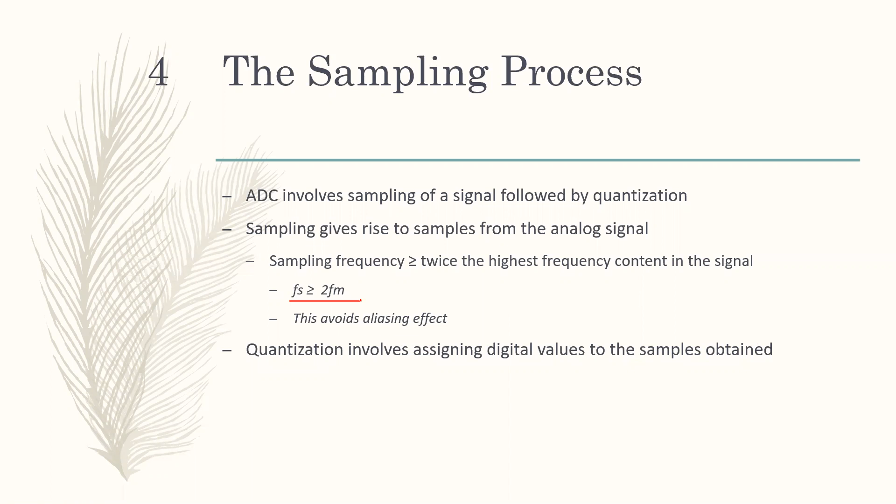Now, one thing to notice is I can have three conditions here. First, Fs is less than 2 times Fm, which is called under sampling. Next, Fs is equal to 2 times Fm, which is called critical sampling, or sometimes uniform sampling. And the last condition is Fs greater than 2 times Fm, which is called oversampling. These are the conditions we can check out.

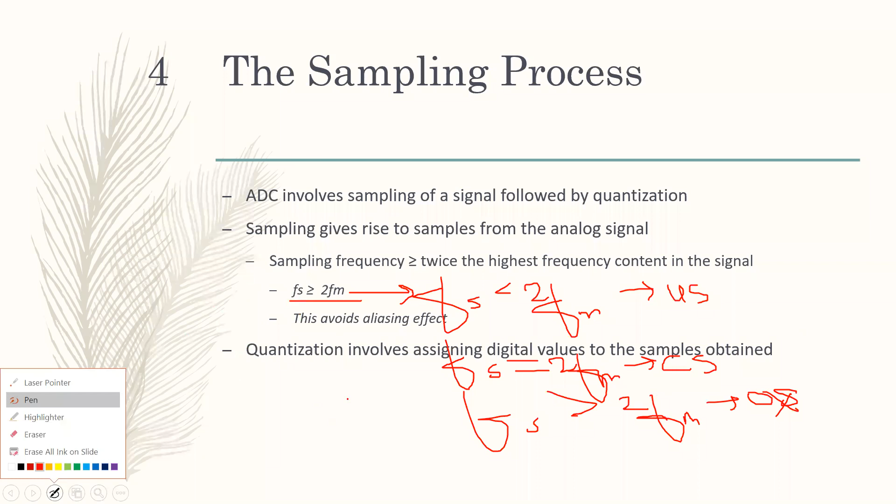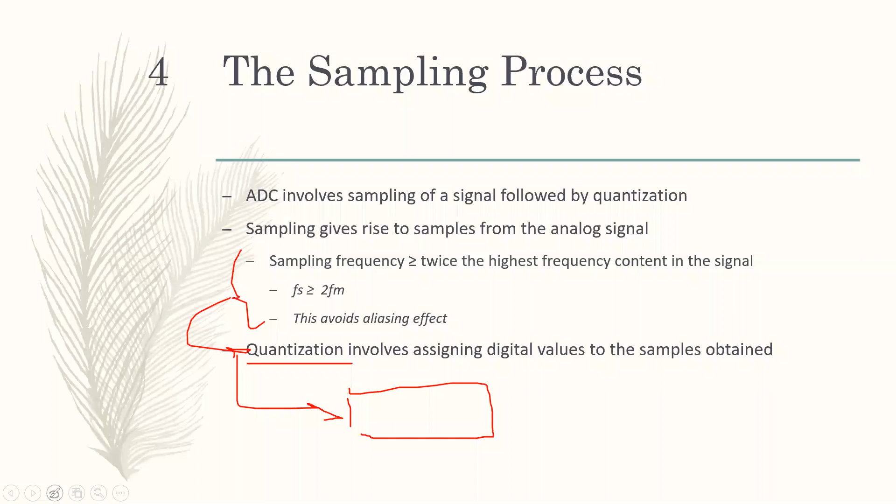That is, I sample with all three conditions, I quantize those values, and once I quantize, I send it to the receiver. The receiver has to try to recover the information from whatever is received and see what signal was sent. So in pulse code modulation, you will be doing these things.

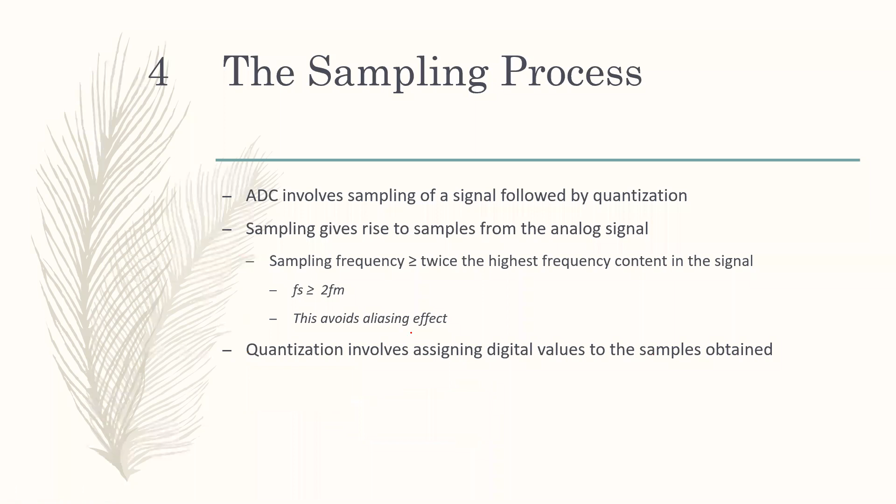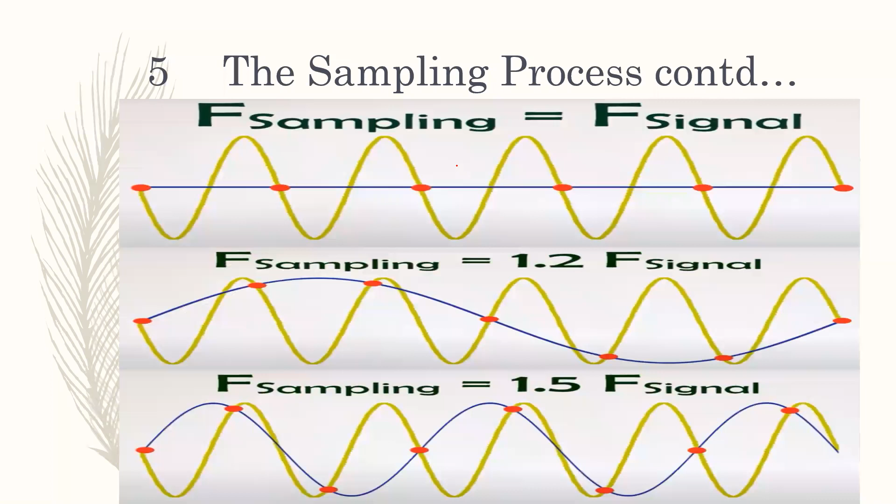This I'll not discuss. So I'll just show a MATLAB program before we go ahead with the Simulink, to see what is actually happening with respect to sampling, and then we'll go ahead with the quantization. Here we have just the sampling code.

This is 0.25 in this case. X is the signal, sinusoidal signal, which will be passed through the sampling process. Now this t is equal to 4, and Fm, that is the maximum frequency present in this signal, is 1 by t, that is 0.25. So let us consider it as 0.25 hertz. Now here we can just observe that Fs is equal to 1.6 times Fm.

So this Fs1 here implies the undersampling condition. If I use Fs1 for sampling this signal, I am doing undersampling. And what happens at the recovery stage? Fs2 is 2 times, which is critical or uniform sampling. Then Fs3, I have written it as 18; I'll reduce it to 8, because otherwise I have to change some other parameters. So it is 8 into Fm, which is greater than 2 times Fm. So this is the oversampling condition.

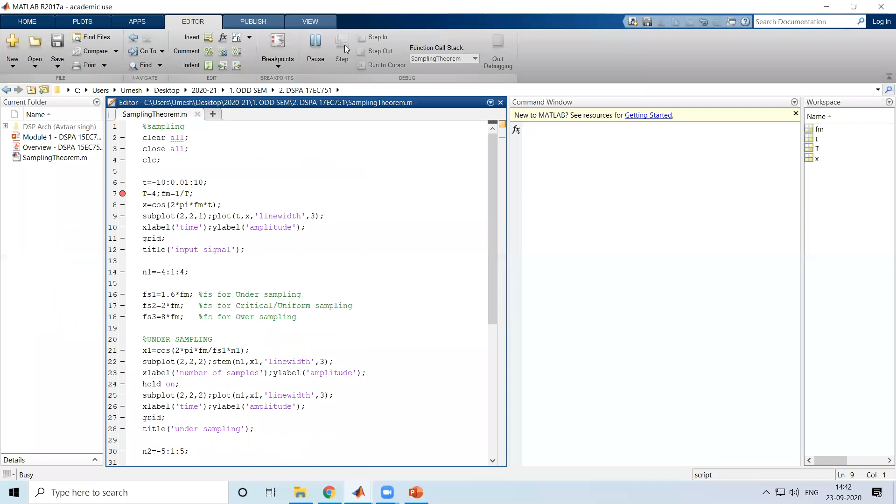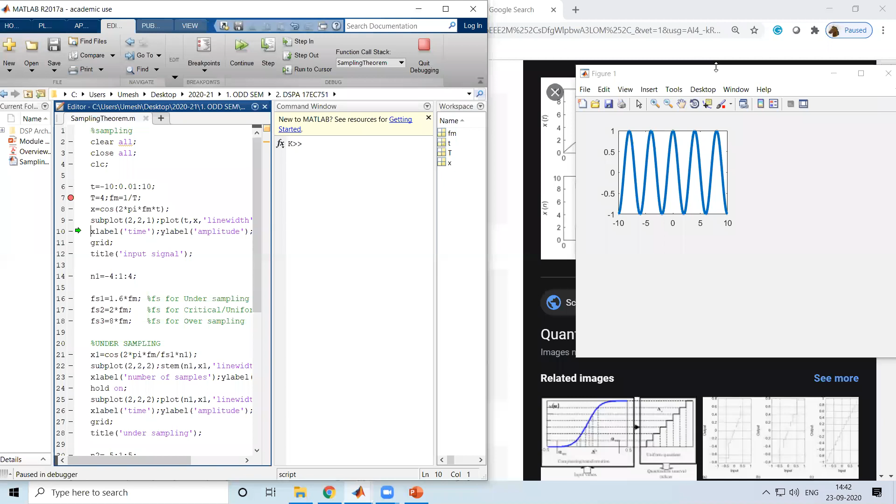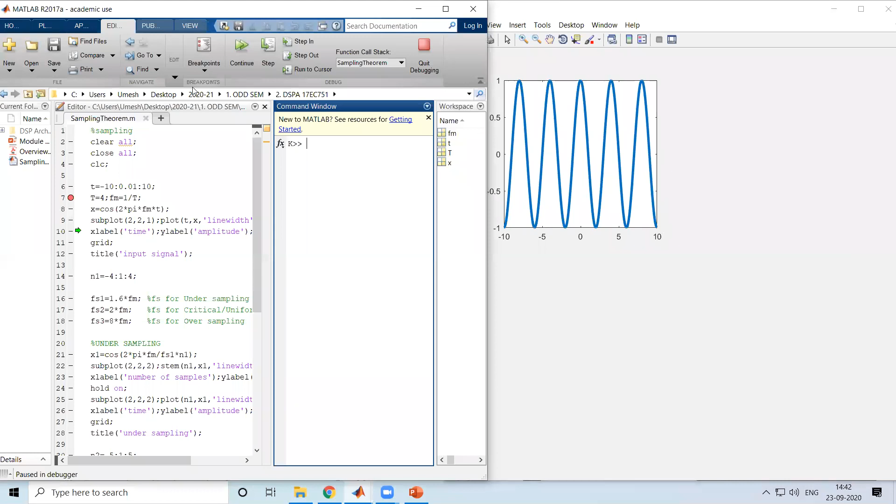Okay, so this is the signal which is present, a sinusoidal signal X. Next, we'll go for the next condition. So fs1, fs2, fs3 will be decided. If I check, it is 0.4, which is less than 2 times fm. This is equal to 0.5, which is equal to 2 times fm, and this is greater than 2 times fm. So these are the values.

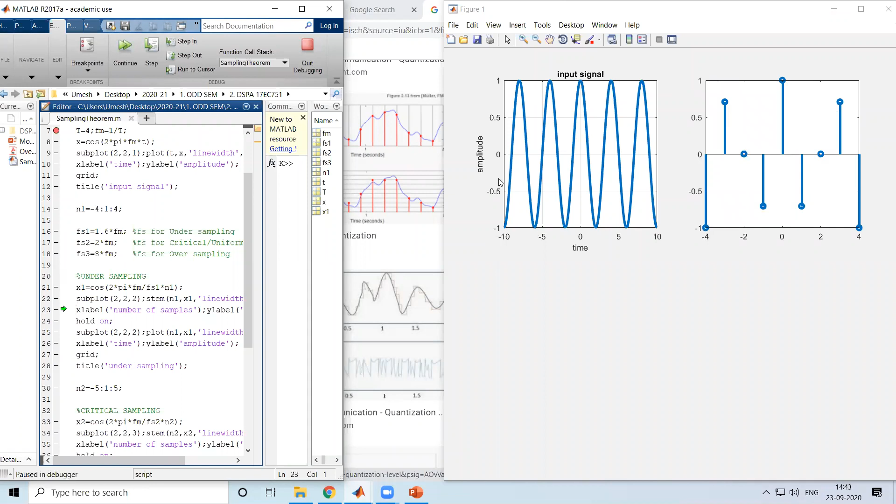So now let us see what will be x1 when we are using the undersampling condition. x1 will be having some values here. If I plot it, these are the samples of this signal. If you see, 1, 2, 3, 4, 5, 6, 7, 8, 9 samples are present for this case when I choose FS1.

Now here, if I try to get back the original signal from these samples, suppose I might use sinc interpolation or linear interpolation. If I give these samples and try to get back the original signal, I would not get the original information. What would happen is you would have joined these 2 points, these 2 points.

So just a rough estimate. So then that would be the signal which you assume was sent. So that is what we'll be doing in the next case. So this is how the signal would have appeared if I'm using linear interpolation. So this is the undersampling condition. Let me go for the next one, critical sampling.

So what happens in this case? Here you can see the number of samples has also increased. Now if I go for sinc interpolation, I might get almost a signal equivalent to the one represented in the first window. But if I use linear, it will come as a triangular wave which will be repeating. So this is how it might appear since I'm just using the linear operation over here. It will just be joining these points.

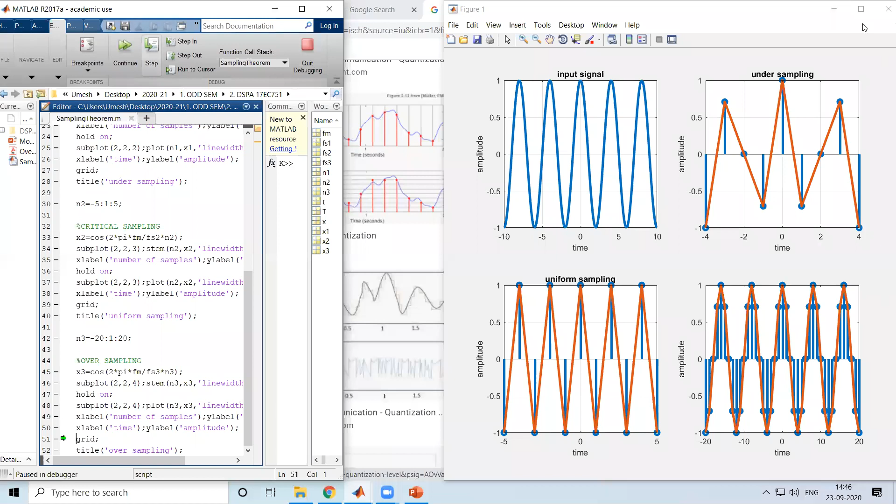So if I just join these points, it would appear somewhat in this form, which is very much closer to the input signal that was sent. So this is the oversampling condition. These are the three conditions. This one is appearing very close to the input signal that was sampled. This one is close enough, but since linear interpolation is there, it is triangular. If I go for sinc interpolation, I would have got very close to the input signal.

So this is related to sampling. One thing to observe is if you do undersampling, recovery becomes really difficult. If you go for uniform sampling, I will be able to recover the signal to some extent. And if you do oversampling, it is assured that you will be very close to the input signal which was actually sampled. Now this is just the sampling process.

Now in quantization, observe these samples you have got. Say these are the voltages represented: -1, -0.5, 0 volt, 0.5 volt, 1 volt. When I take samples, the sample can be at any voltage level. For example, if I use 3 bits, I might start with 000 here. So -1 is represented with 000 and +1 with the highest, 111. So I'll have a total of 8 levels, and I have to divide -1 to 1 into 8 levels.

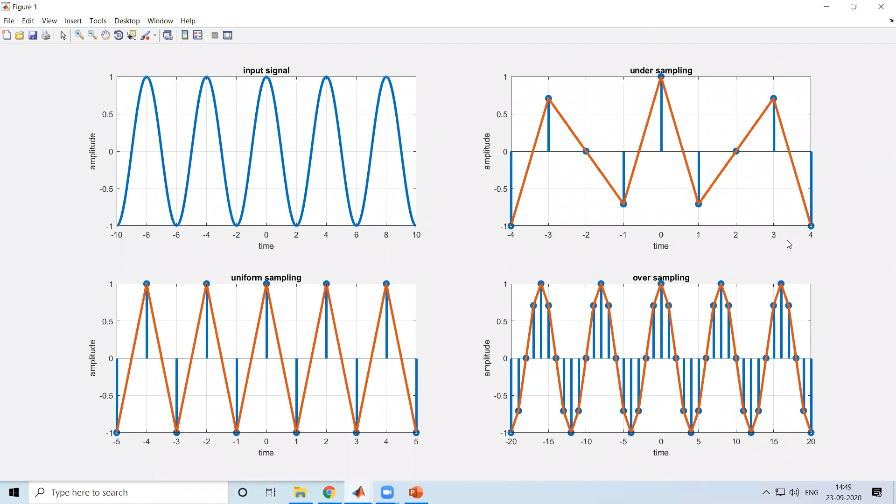So this is with respect to sampling. And in quantization, you are assigning some digital values. So just come back here. That is what is represented here, just another representation so that it will be clear enough. This entire thing is the analog signal, and I want its digital equivalent.

So first I take the samples of these signals based on the sampling frequency. That is where you get the discrete signal. After sampling, whatever samples you have got, we classify them as discrete signals, in terms of x of n.

Now here, just for example, what he has done is he has taken... So in sampling, what you do is you do the digitization of the time axis. So at 0, you take one sample. The next sample you will be taking only after the sampling period. So the next sample will be somewhere here, and based on that, you will be assigning some value to that.

So here, if I just take, this is the value. So in the same way, after every TS seconds, I'll be taking one sample. So in sampling, you are digitizing the time axis. Once you get the samples, you pass it through quantization. So quantization, indirectly what we specify is, it is the digitization of the amplitude.

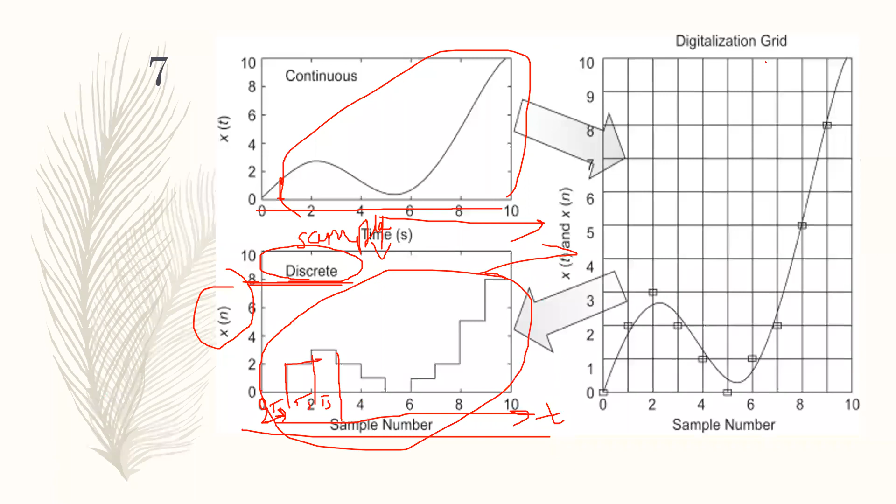So here both the things are given together, and we are just terming it as a digitalization grid. So here we can see that the same signal is represented over here, and these are the samples I'm taking based on the sampling frequency, wherein I am digitizing the timing axis. So I start with the 0th position. The 0th position voltage is 0.

Next sample is taken at this point, which is somewhere here. So if I take this as voltage, I just represent it as somewhere here, more than say 1 volt, just for example. Next sample at 2, the sample is actually over here. Next sample, which is here. So similarly, we continue. Now, once I get these samples, I pass it through quantization.

Now here in quantization, what we have done is we have just taken say 10 levels of representation. If the voltage falls within this, what should be the value represented? Say since we have 10, so 4 bits at least. So this sample will be assigned 0, 0, 0, 0. Next sample is somewhere here, which is close to this level. So this sample value will be assigned with 0, 0, 1, 0.

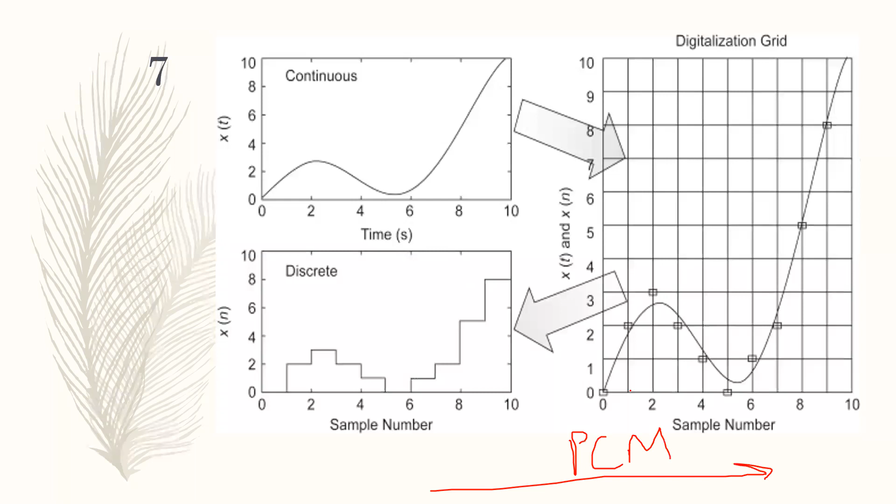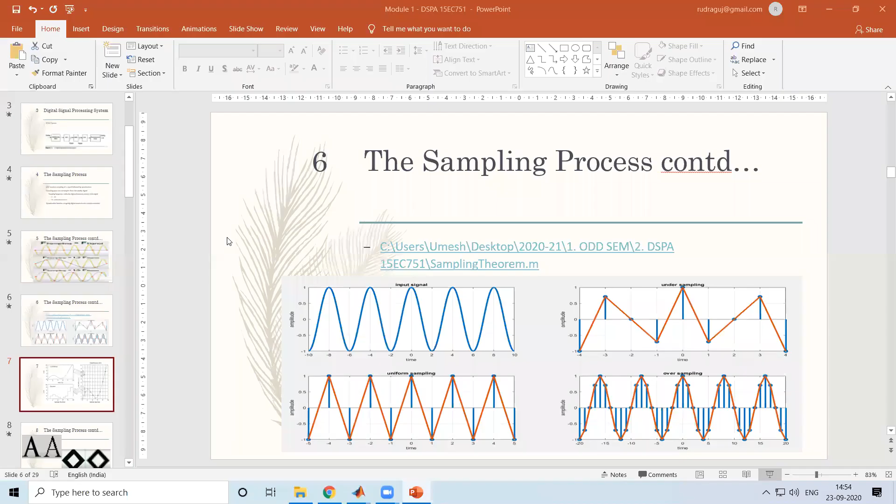So this gives rise to the PCM signal. That is, both these steps together will give rise to the PCM signal. So this is actually the theoretical aspect behind PCM. Now let us see how we can implement the same using simulation. So already I have opened Simulink.

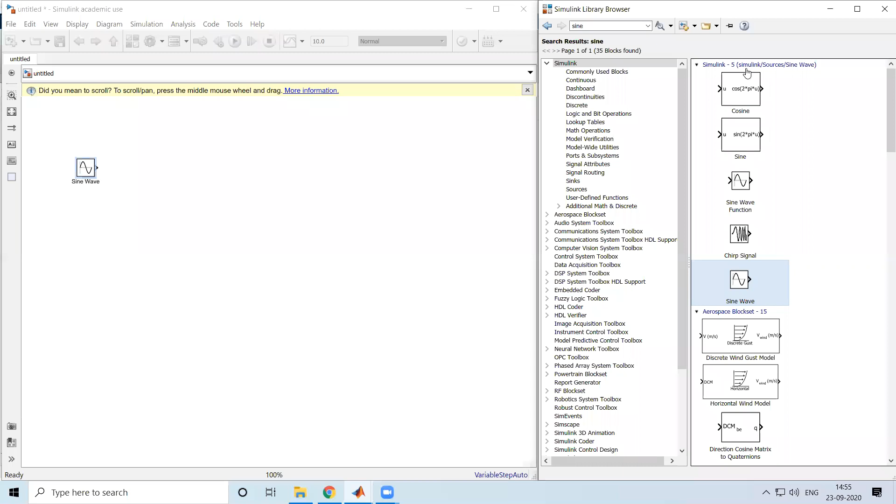So now I'll be adding the blocks as per the requirement. First I need to add a source, so I'll be considering a sine wave source. We can see many options here. Here we have a sine wave function which falls under math operations. Sorry, I will take this one, the sine wave which falls under sources. So you have to add it to the model. So I have added a sine wave, which falls under Simulink sources, sine wave.

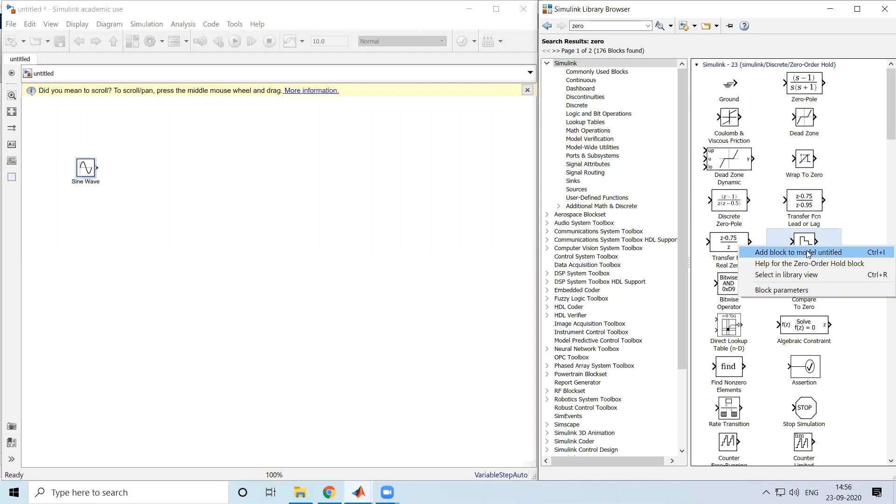Next block, I require a sampler. In order to do that, I take a zero order hold, which gives us a sample and hold kind of function. It will take samples and hold those samples for some time. So I'll add this block. This block gets added. I'll just connect this. So these two are connected.

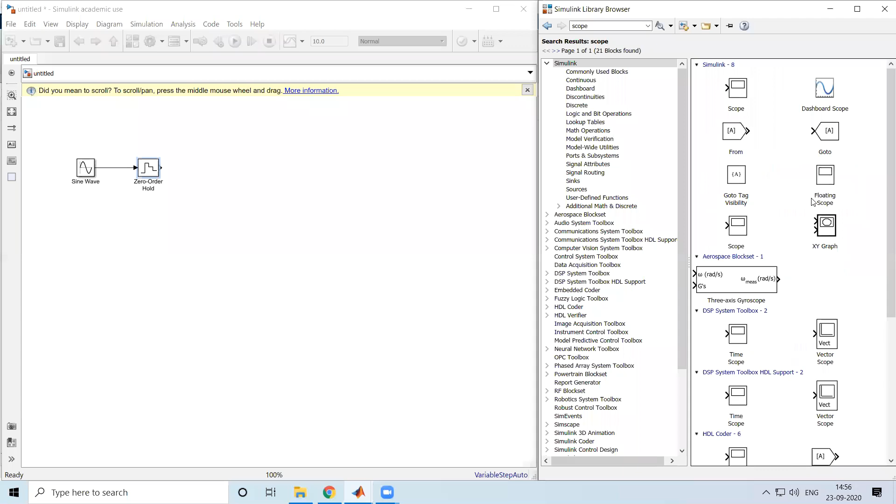So here I should be getting the sampled information. What I'll do is I'll just check the overall result of this using the scope. So I'll add this scope. Now I'll not do any changes. I'll just save this and let us see what will be the overall result.

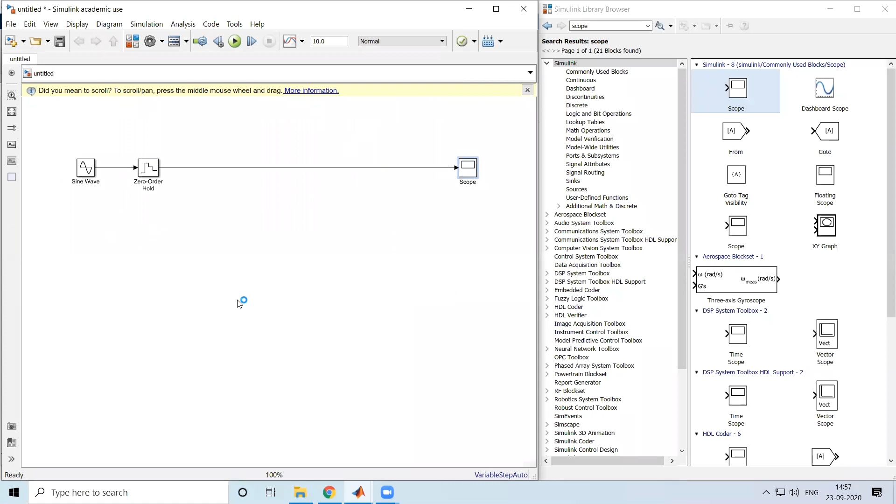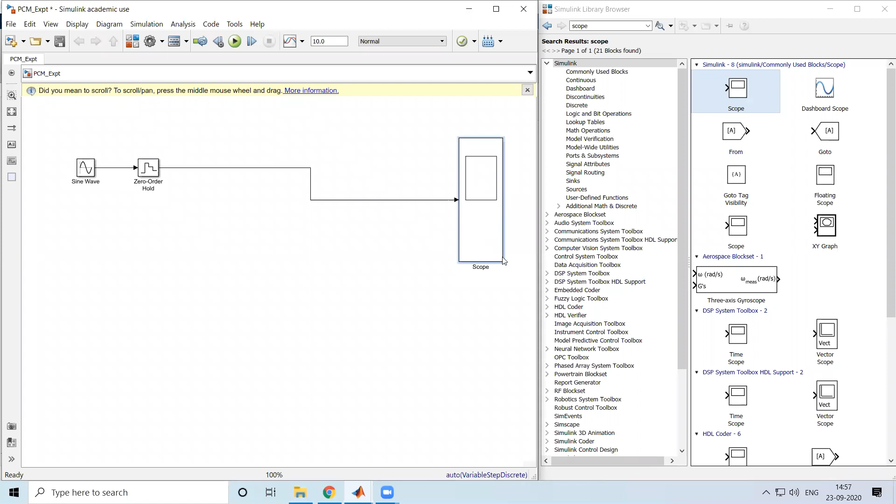So first thing, I am trying to get the samples of this analog signal. Now I'll just run this model. Okay, everything is fine. Now it has run. So let me see what will be available in the scope now. So this is what is available in the scope.

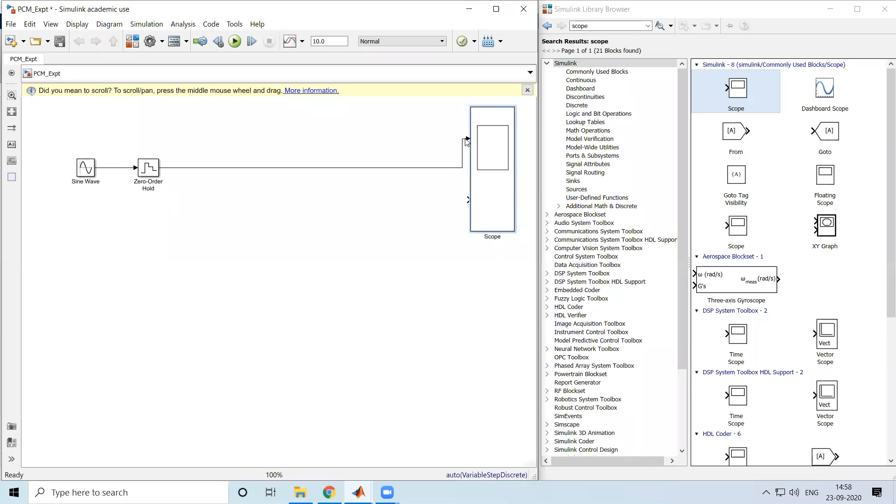So let us see what is actually the input. So what I'll do is I'll increase the number of ports, layout. So at this second one I'll be applying the sample value, and for this one I'll be applying the input. So I'll run this.

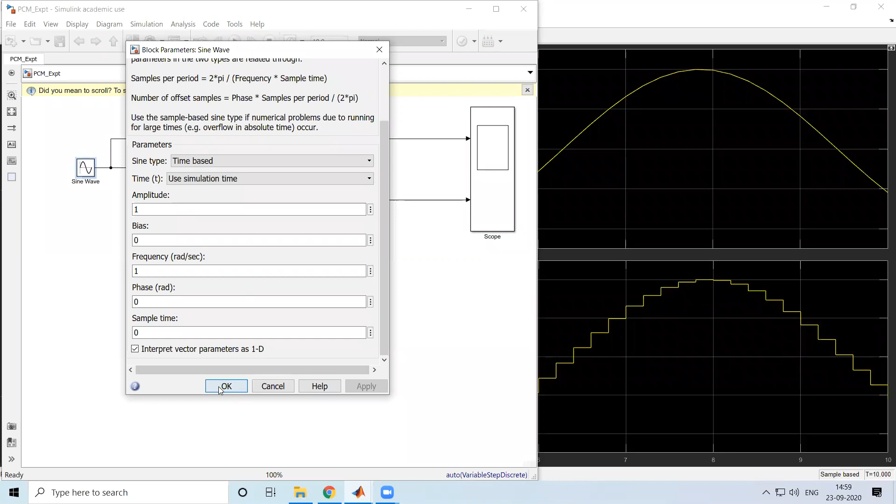Now if I want to see the properties of that block, you can just double click. So here it is time based, amplitude, frequency is 1 radian per second. So based on radian per second, you should be estimating the values. Now this is zero order hold. I have nothing much to change over here. So what I can control is this particular case. Suppose if I make it higher, I might be providing the other conditions. So we'll just see what happens.

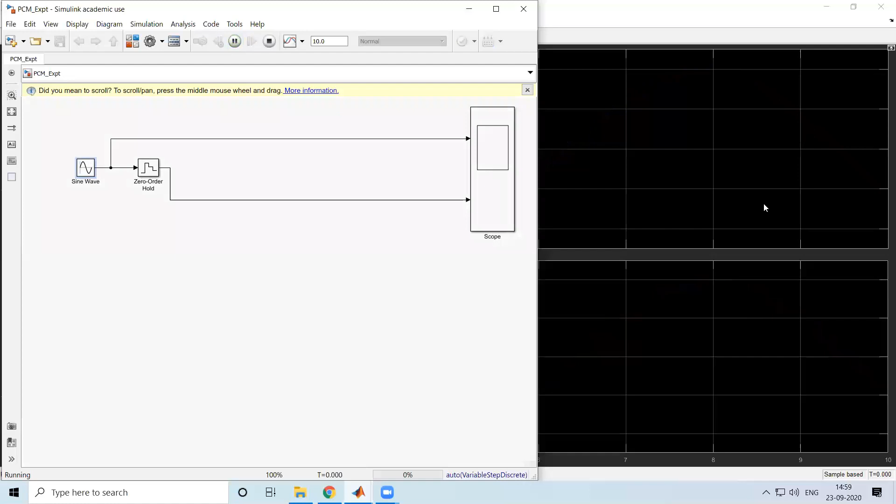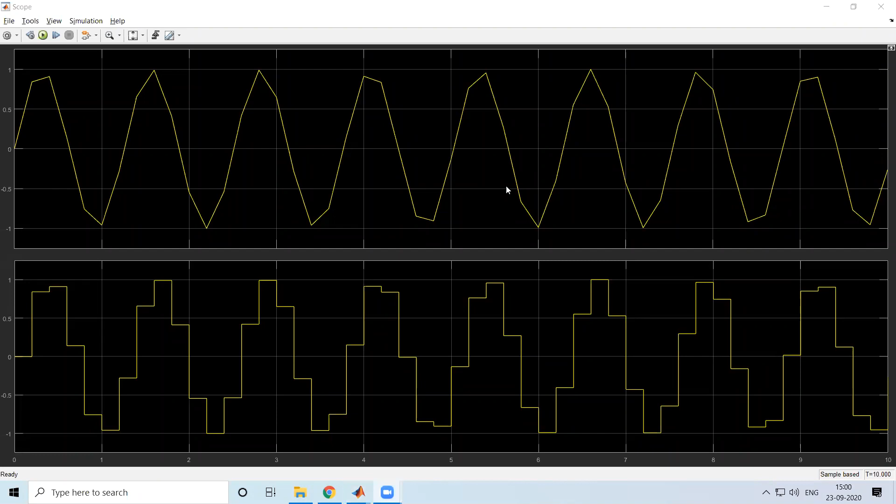So here we can see why this happens: it is generated by the system, which basically again uses sampling itself. So this is not supported. Let's see, instead of 10, go for 5. So what is happening in this case is again I'm not getting the proper samples over there. So I'll just keep it 1 and I'll run it in that form.

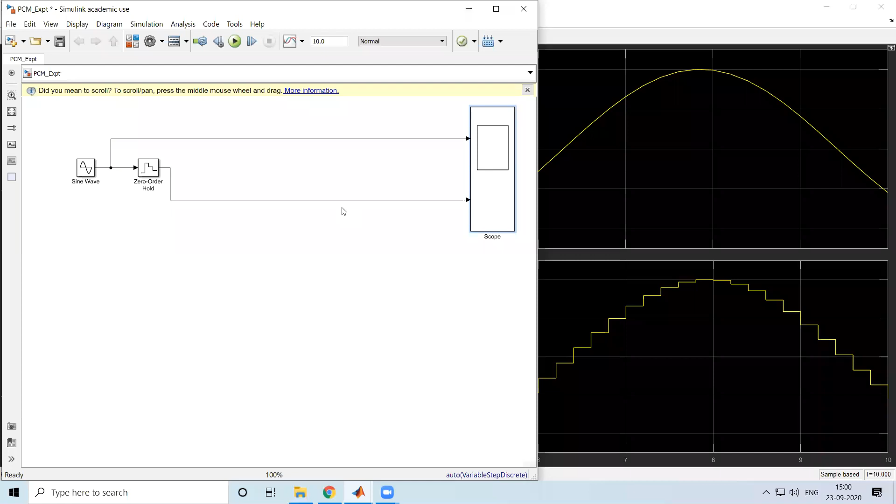So in that case, I'm able to get the sine wave and I'm getting these samples. These are the samples. So two things are okay now, I'm getting the samples. Next, I should pass this to the quantizer. So in this case, I have a block called a quantizer. So I'll add this block. So this is the quantizer.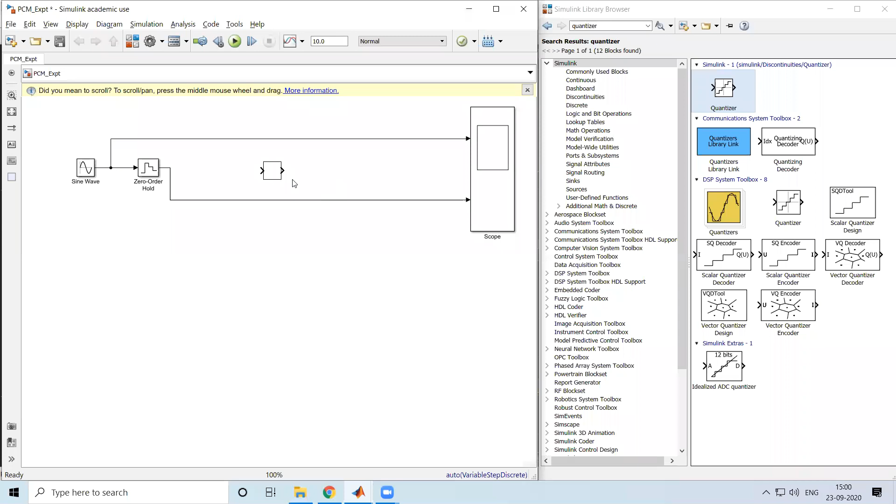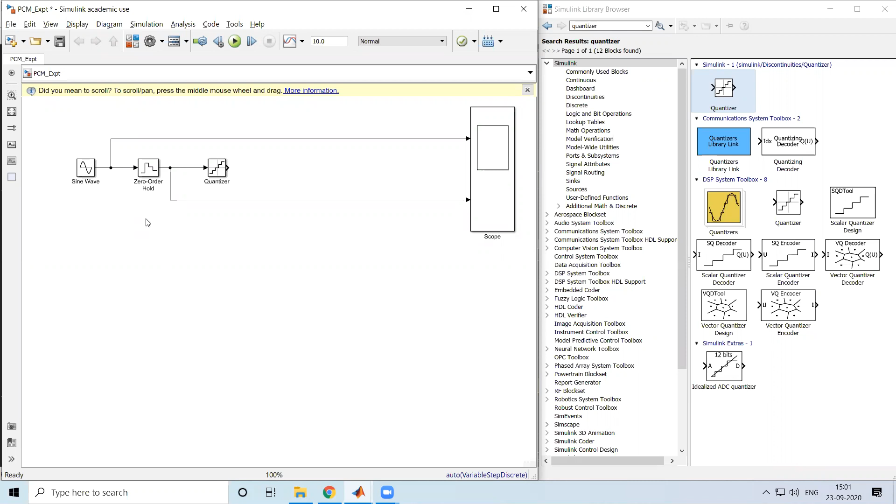Okay. So the quantizer is provided with the input which is relevant to the samples of the input signal, the samples of the sine wave in this case. So now let us see what will be the quantizer result, which is given to the third port. So I'll just change the layout over here since 3 ports are there. So now I'll run this.

So first was the input analog signal. Then I took the samples. We saw the samples, and I have given it to the quantizer. So let us see what happens in the quantizer. So here you can see some representations are given. It is all dependent on the quantization bits, how many bits you are using. Now here if you just observe this signal, that is the quantization.

So this is the input sine wave. This is the output which is the sampling information, and this is the quantizer result. So what is the quantizer doing? The quantizer is taking these samples and assigning zeros and ones to it. Here I'm not able to represent it because it is in a different form. So based on the samples, it will be assigning zeros and ones, and those are represented over here. These are the different levels.

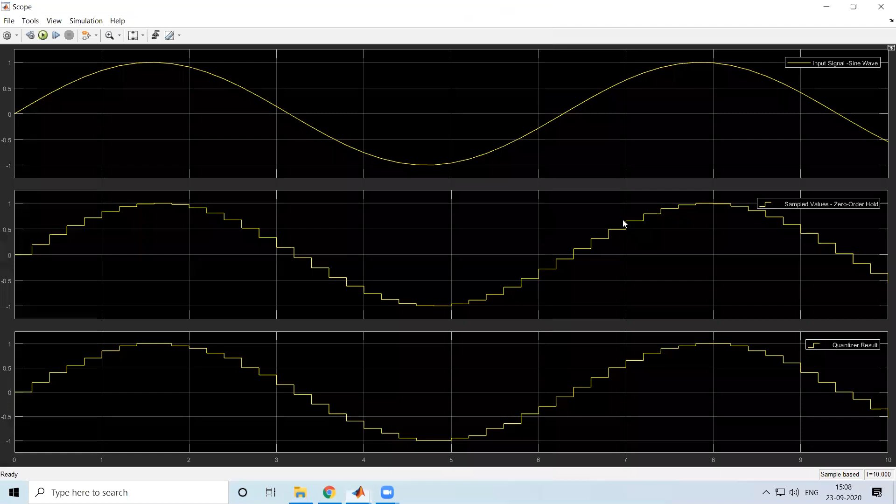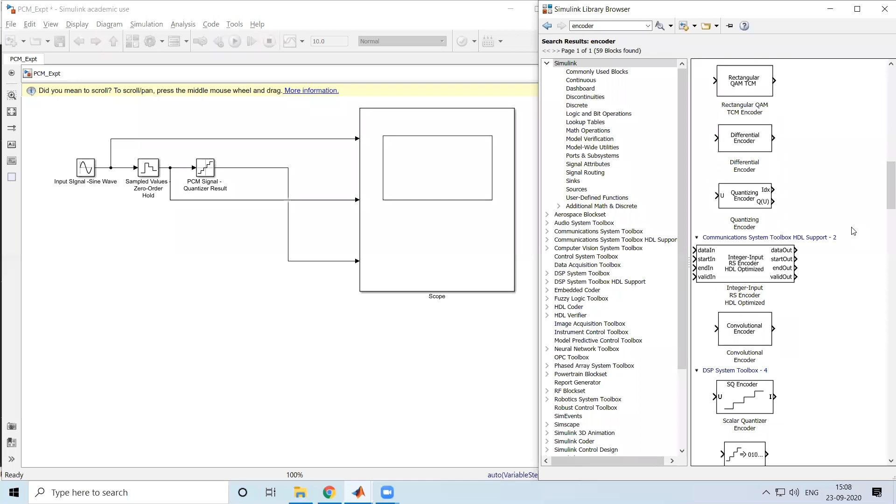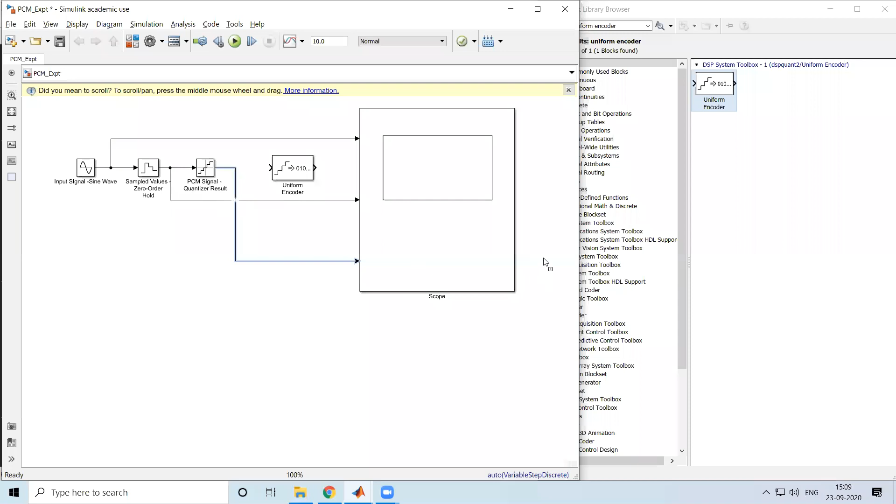So what kind of encoder, we'll just check. Encoder. So I'll be taking a uniform encoder, which is present in the DSP System Toolbox. I'll add this. So for this encoder, I'll be encoding the PCM signals. So now I'll just check out what these encoded results are. We'll not discuss much on this. We'll just see what results we'll be getting. So I have added, I have changed. So I just changed the layout.

The encoded signal will be received at the receiving end. So let us assume now we are not putting any modulation block over here, just for simplicity. Actually, if I have to go ahead, I have to put a modulation block and then transmit the signal. So now we'll not complicate that. We'll just try to see it in a simpler form. So now the uniform encoder result is transmitted to the receiving end. Now at the receiving end, I should do the reverse process. So first I should decode, and using the other information, I should be able to get back the original sine wave.

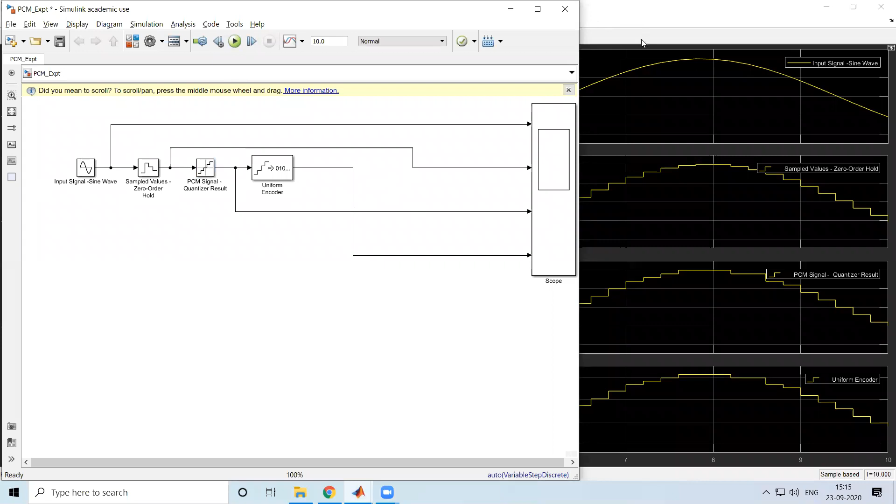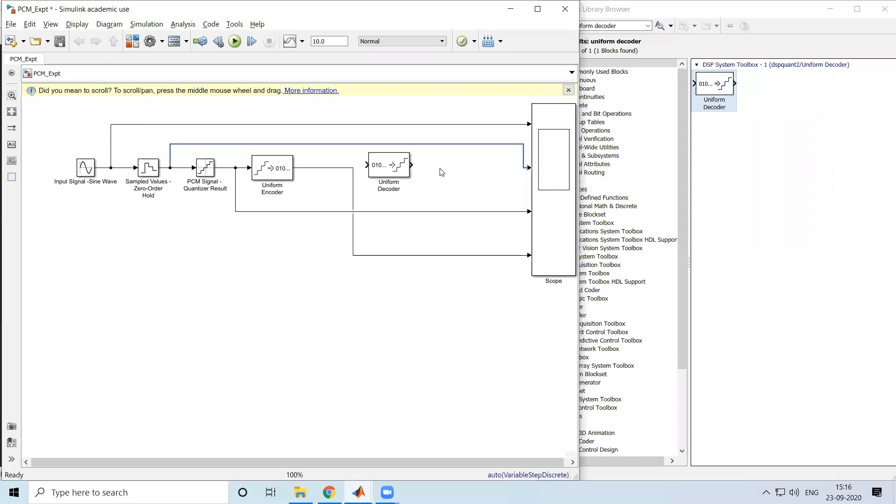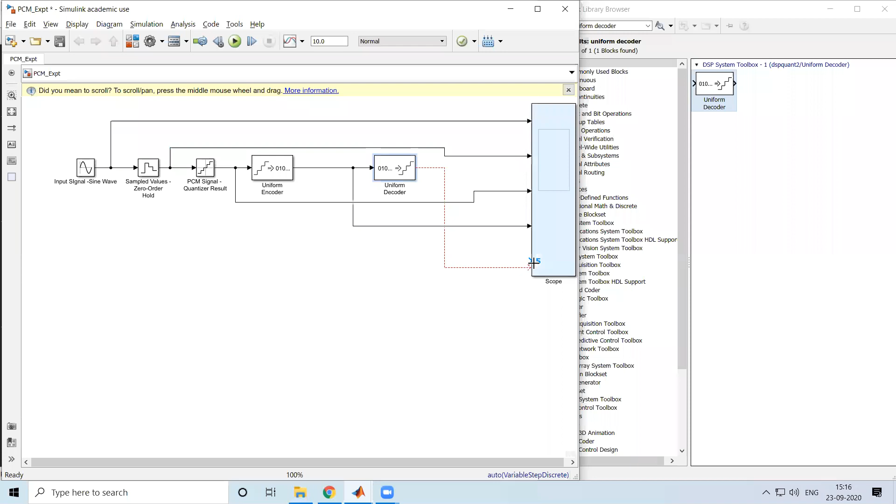So in order to do that, I'll be using the reverse one, that is the uniform decoder. So this is the uniform decoder. Now let us see what will be the result of this. Bit should be set. So here I'm not able to get back the decoded information that I should be getting, because the PCM signal is given to the uniform encoder. Now this encoder result is received at the receiving end, and that has to be decoded back to the PCM signal that was sent.

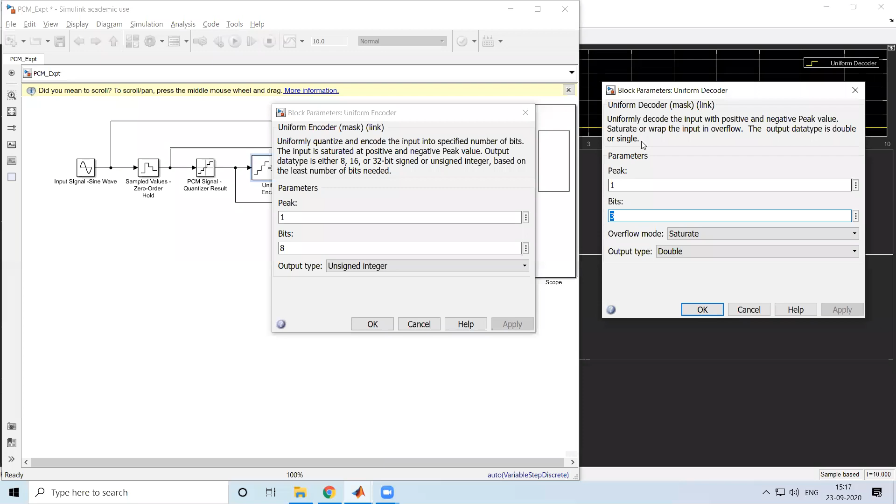Now here I should check, and if I check this one, this is the uniform encoder. How many bits are you using? You're using 8 bits. But for the decoder, how many bits are you using? That's why I'm not able to get back the original information. So these two should be the same. So I'll apply it. I have made the change. I have made both 8 bits. So let me see whether I'll be able to get it. Okay, somewhat I'm able to get back the decoded information.

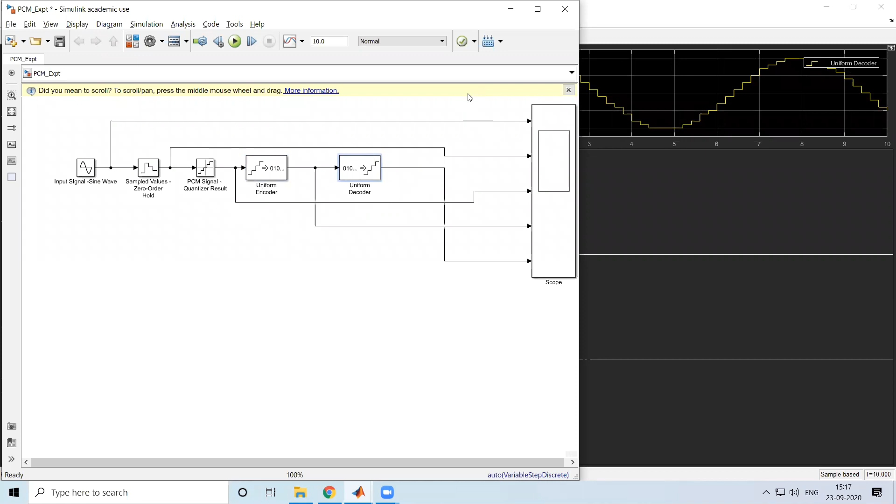Now, since we are doing it in Simulink, these are pretty simple steps that we have obtained. After this process, actually we should have a block which takes the zeros and ones and maps them to voltage representations. So if this is 000, it is 0 volts. If this is 001, say for example, it is 1 volt. If this is, say, 010, then it is mapped to say 1.2 volts, something in this form. So after mapping those, I'll be getting back the sampled information, and then I'll be using interpolation in order to get back the signal.

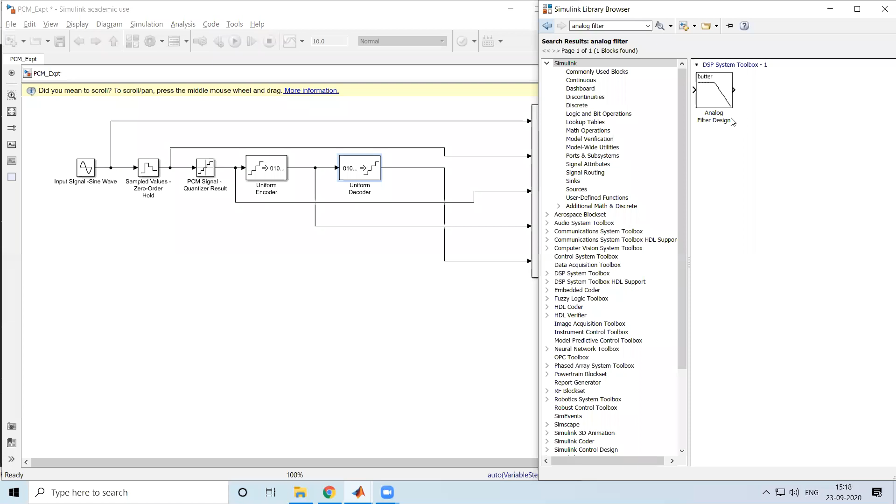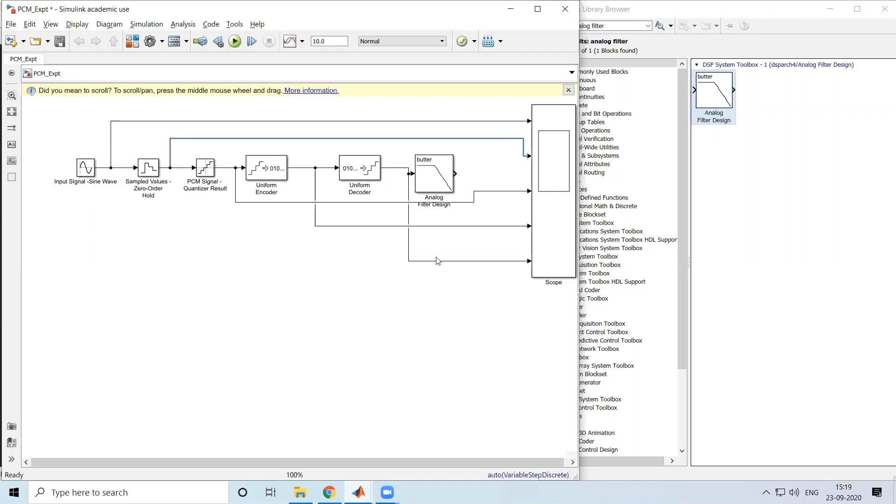Now here, since we are just passing the sine wave and then obtaining the encoded and decoded information, we'll just pass it through a filter, which is an analog filter, which does all those processes for me. So it is the analog filter, a Butterworth low pass filter. So now I have a filter over here. So the filter will be given the decoder output. So let us see what happens when I pass the signal through the filter.